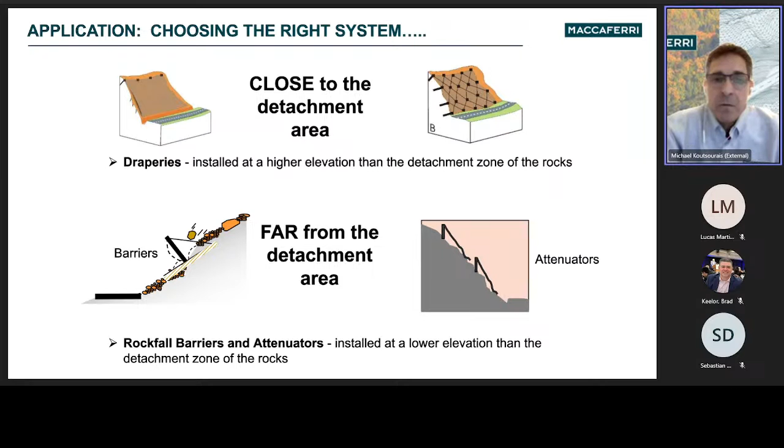Dynamic rockfall barriers are considered passive protection systems. They don't prevent the hazard from occurring, they intercept it and protect against it doing damage. It's necessary to determine the energy that the protection system must resist, as well as the protection system's required height and allowable deformation to keep the hazard from impacting adjacent people and infrastructure.

Rockfall barriers can resist energies from 10 kilojoules to 10,000 kilojoules. We generally categorize barriers with capacities of less than 100 kilojoules as low energy barriers, between 100 kilojoules and 5,000 kilojoules as medium energy level barriers, and greater than 5,000 kilojoules as high energy level barriers.

A rockfall barrier consists of many different components. The main elements are the posts, which are tied into the foundation components, and the interception panels, which are hung between the posts. However, there are also cables, anchors, and dissipators connected to these posts and interception panels that fully comprise the barrier system.

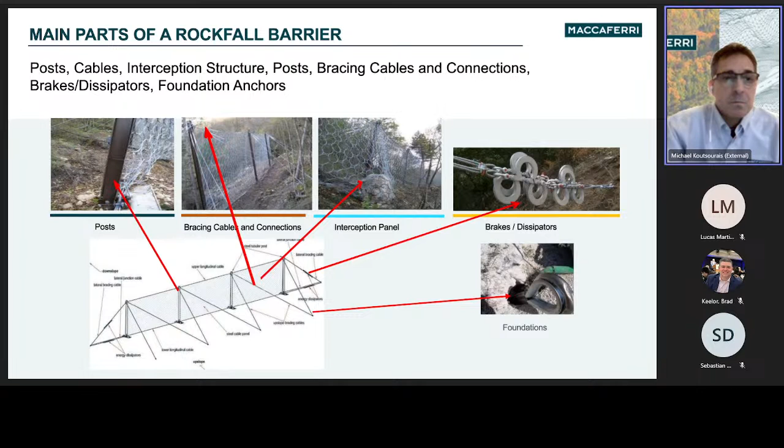Before we can apply a barrier in the field, we must know its limits, so we must first perform research testing to determine the barrier's performance. The European Organization for Technical Approvals, EOTA, developed a guidance approval of falling rock protection kits, referred to as ETAG 027. Rockfall barriers are tested in accordance with ETAG 027, and if passing the performance evaluation, the barrier is awarded a certification or CE marking.

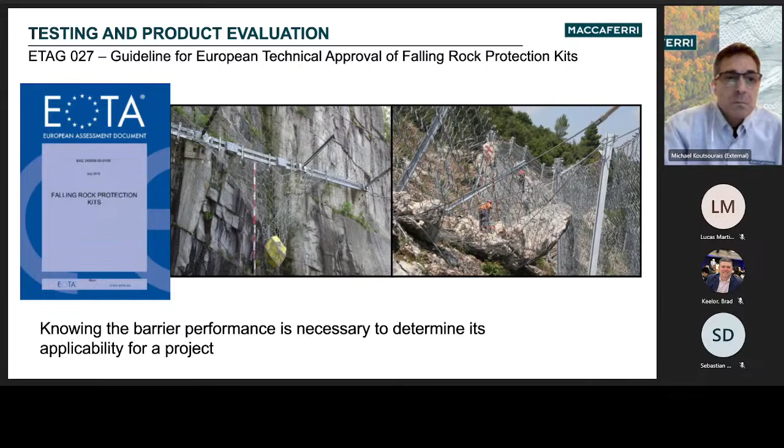ETAG 027 has been a guideline for European technical approval of falling rock protection kits. This defines the methodology to carry out full-scale field tests, and it defines the materials used for rockfall barriers. After the barrier is tested and evaluated, it receives a CE marking certification.

And here's a short video showcasing the ETAG 027 test.

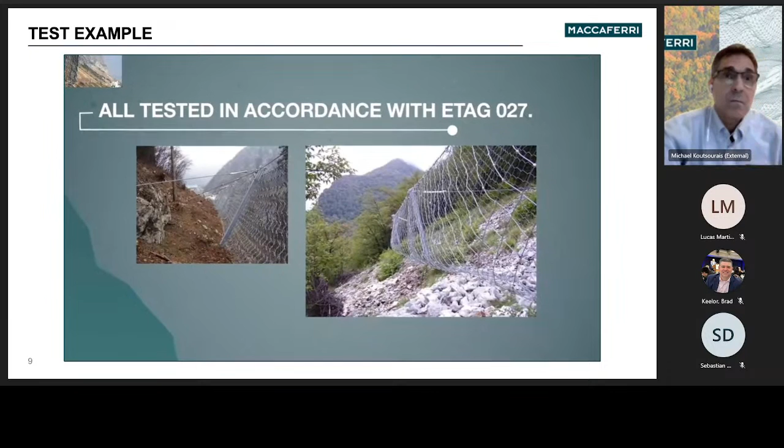There's a newly developed standard, EAD 340089, which applies to barriers less than 100 kilojoules. That's what we refer to as lightweight barriers.

One main part of the testing evaluation is to determine the barrier's maximum energy level capacity, or MEL. The maximum energy level is defined as the highest level of energy that the barrier can withstand. However, the barrier would actually be guaranteed to resist that energy, so it's in essence a minimum level of resistance for that barrier. It's certified to that specific energy level, but it will withstand impacts at least at that level.

The barrier is considered to have passed a particular MEL if it simply stops the block upon direct impact at that energy level.

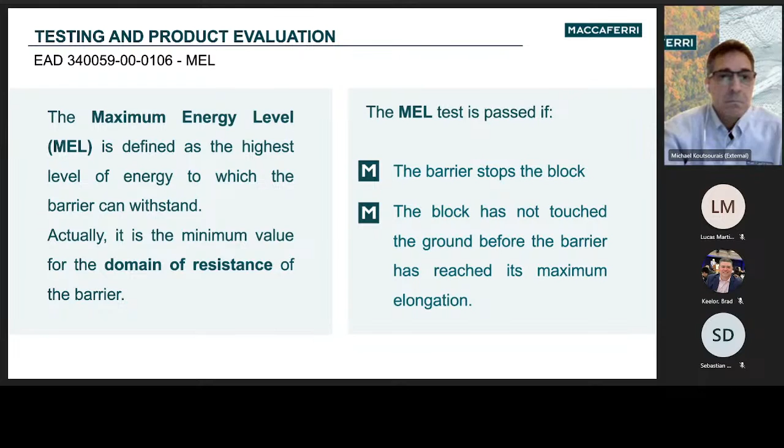Another important part of the test is to determine the service energy level of the barrier, or the SEL. The service energy level is equivalent to 1/3 of the MEL, and the barrier is required to withstand 2 impacts of that energy level without having to be repaired after the first impact.

So in essence, this is thought of as an energy level for which there is no need of maintenance after 1 impact. So if the barrier is being tested at a maximum energy level of, say, 3,000 kilojoules, it would have to sustain 1 impact of 3,000 kilojoules and 2 impacts of 1,000 kilojoules, which is 1/3 of the MEL. The SEL test is passed if, first, the barrier stops the block, and second, the residual height after the first impact is at least 70% of the original height of the barrier tested.

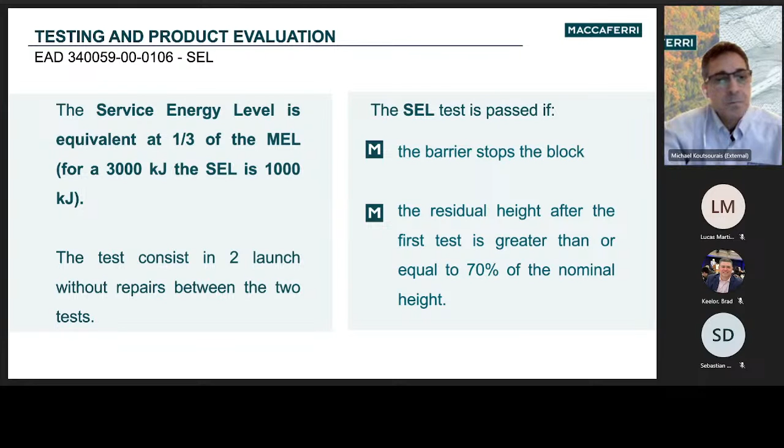Barriers are typically tested with a vertical drop of a reinforced concrete block of known dimension and density. The mean velocity of the block within the last 3 feet from the contact point with the net must be at least 25 meters per second. The impact energy is equal to the kinetic energy of the block, given by the equation: energy equals 1/2 times the mass times the impact velocity squared.

The tested barrier is installed with 4 posts providing 3 spans, as you see here. The test is conducted with the block impacting the barrier in the center of the center span. Because the test is performed on a barrier with 3 spans, it is always recommended to install barriers in actual

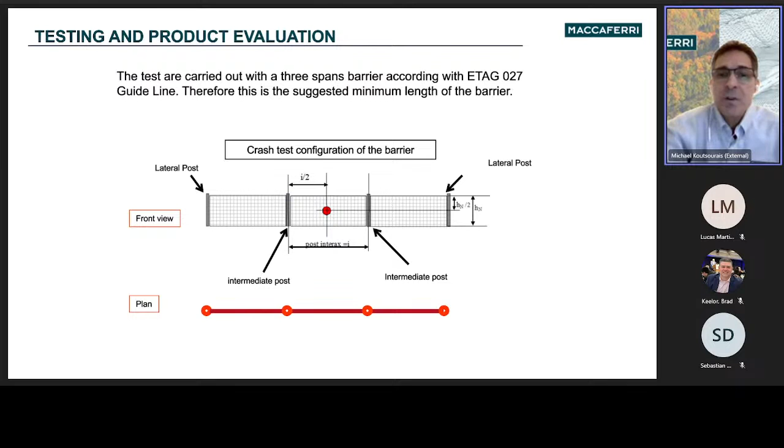field conditions with at least three spans so as to conform to the actual test conditions. Further, the EAD certification is applicable to tested barriers, but within certain geometrical limits of the barrier's height and post spacing. For example, if a barrier was tested with a height of 3 meters, you wouldn't be able to construct this barrier on your project to a height of 6 meters and still be in compliance with the certification.

The same applies to post spacing. If the tested barrier was tested with a post spacing of, say, 10 meters, you wouldn't be able to construct the same barrier with a post spacing of 5 meters and still be in compliance with the certification. So these geometrical changes will affect the barrier's performance and the foundation loads. Please keep this in mind.

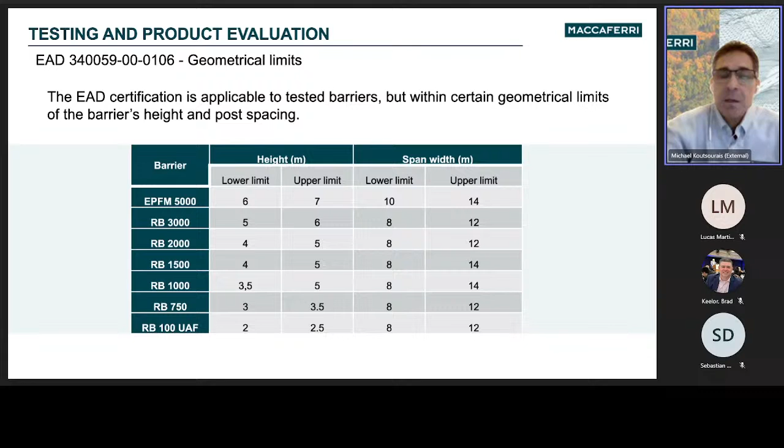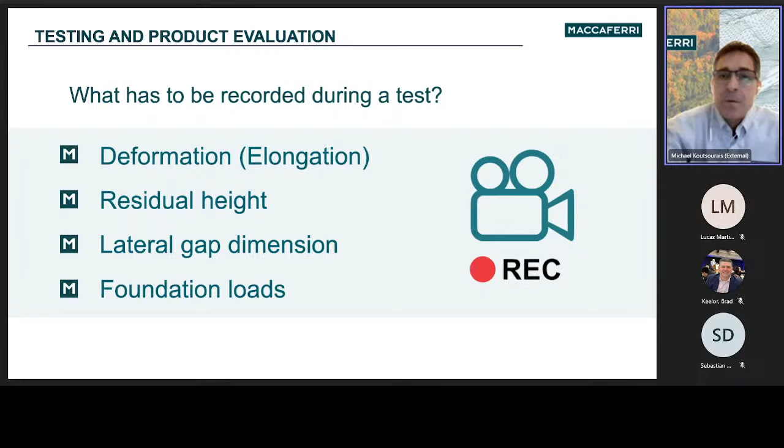During the field testing, the primary items that are recorded are the barrier deflection, the residual height, the lateral gap dimension, and the foundation loads. We'll further discuss each of these separately.

One of the key performance features recorded during the test is how much the barrier deforms or elongates when it's impacted. Remember, these are not rigid barriers. They will deform or elongate upon impact. In fact, the energy is absorbed by the barrier as it deforms - energy dissipation through deformation. It is particularly important to know the barrier's deformation upon impact when designing a barrier close to infrastructure.

Another key performance indicator is the barrier's residual height. So the barrier height is determined as the distance between the upper and lower longitudinal cables located at the top and bottom of the interception panel. As the barrier is impacted and the interception panel elongates, the height of the barrier is pulled down to its residual height. This residual height is measured as a percentage of the barrier's original height before impact. So the greater the barrier's residual height, the better the barrier has performed.

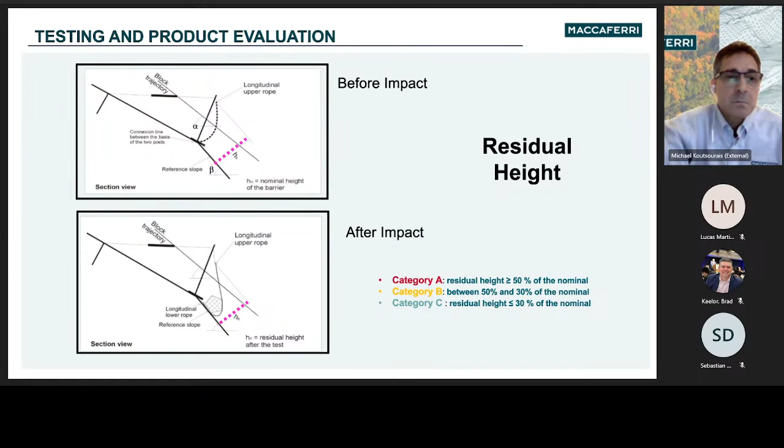The lateral gap should be considered during the design phase in order to ensure that the required protected area and the length of the barrier are equivalent. Otherwise, there may be a need to add extra length to your barrier in order to ensure full coverage of the hazard area. Essentially, all of these recorded performance features - barrier elongation, residual height, lateral gap distance - determine how well the barrier maintains its initial configuration after impact and is therefore able to maintain its protection as originally intended.

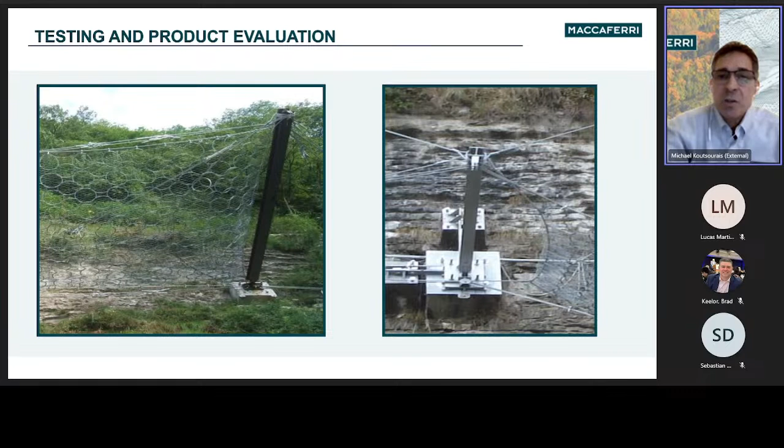In summarizing the Maccaferri portfolio of tested and certified rockfall barriers and their performance, here you'll see that Maccaferri offers a full range of tested and certified barriers ranging from 35 kilojoules, which is our RB 035 barrier, to 9,000 kilojoules, to handle your site-specific conditions. We can also custom design specific barriers for special cases, and any custom design that we do is based on the data that's developed from these tested barriers.

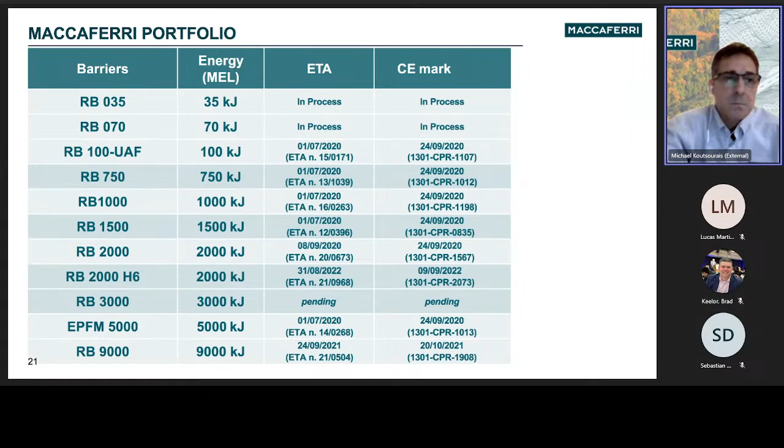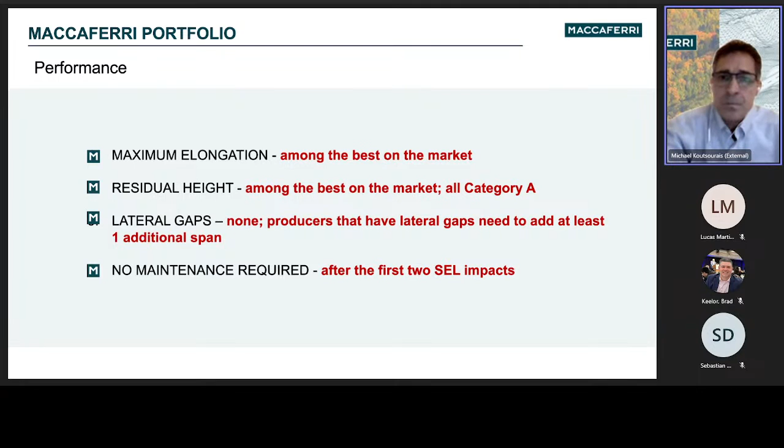Looking at the specific performance features of Maccaferri's barriers, the maximum elongation of Maccaferri barriers are amongst the lowest in the market. The residual height of the Maccaferri barriers are among the highest in the market, in the highest category A. Maccaferri barriers have no lateral gaps after impact, so there's no need to add any additional span of coverage. And after 2 service level energy impacts, Maccaferri barriers still require no maintenance. Remember, the certification only requires that after the first service level energy impact, no maintenance is required. In our case, all of our barriers, even after 2 service level energy impacts, still no maintenance is required.

Now moving into the design of rockfall barriers. The first step in the design process would be to understand the external structure of the rocks in relation to the topography of the slope, the geotechnical parameters and cross-section of concern, to understand the source of the rockfall event and its path down the slope.

The next step is to model the rockfall and select the barrier design parameters. Two software programs are often used for this purpose. One is the Colorado Rockfall Simulation Program, referred to as CRSP. The other is a Rocscience rockfall program that assesses slopes at risk for rockfall.

So first we need to model the type of instability. Specifically, is the rock free falling? Is it bouncing, rolling, or sliding? And we need to determine the initial velocity, acceleration, and position of the free fall.

So an understanding of the source of the rockfall, the design rock size, the path down the slope, the bounce features, velocity, and kinetic energy are important in order to determine where the barrier would need to be placed, how high the barrier needs to be, and how much energy the barrier needs to resist.

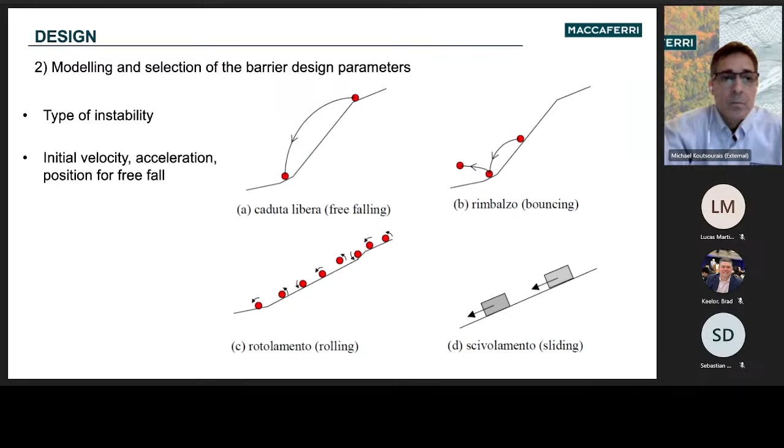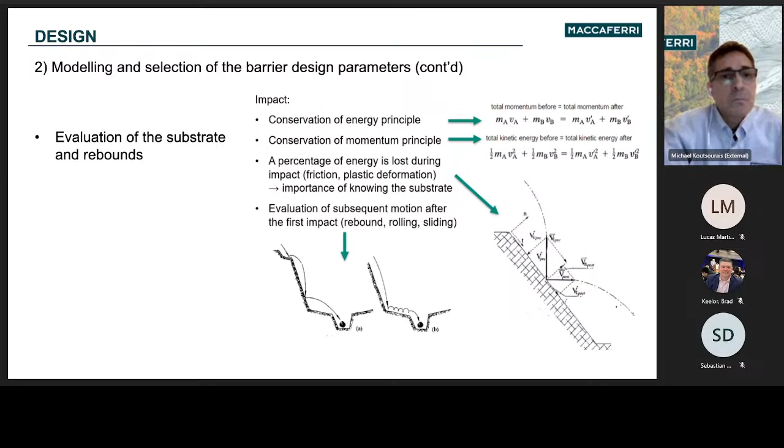The next step is to evaluate the substrate and the rockfall impact rebounds that might occur. And then finally, we need to apply those same steps for all the potential rockfall trajectories and statistically analyze the results for use in the barrier selection.

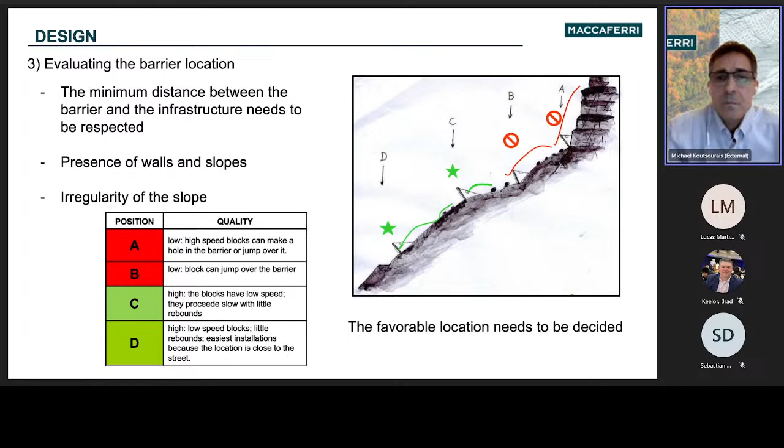The rockfall simulations will allow the designer to determine the energy that the rock will produce and the barrier must resist. So it's important to know both the maximum energy level, or MEL, that the rock will produce, as well as the energy of the more frequent rockfall occurrence, which would represent the service energy level, or SEL. The design barrier energy level should be the greater of either the maximum energy level or 3 times the energy level of the more frequent occurrence, or service energy level.

So it might also be prudent to apply a safety factor to your design energy level, depending upon the risk to human life and whether the protected infrastructure is stationary. For instance, if the protected infrastructure is stationary, then there is a higher probability of damage should an event occur. This would warrant a higher safety factor for your design energy level and barrier height.

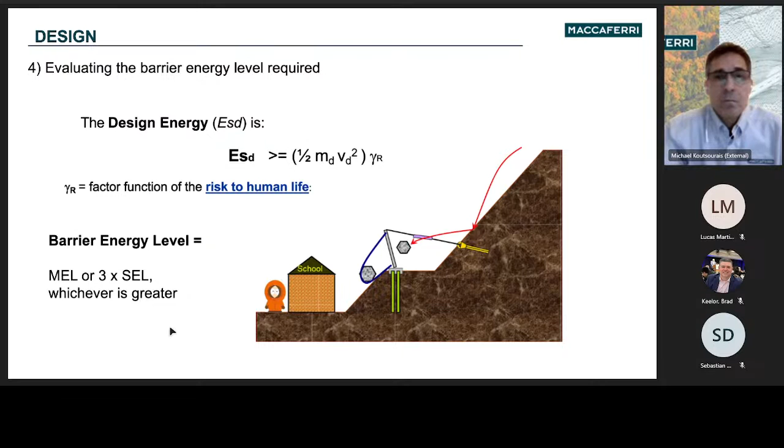When a rockfall barrier is placed, we have to verify the minimum distance between the barrier and the road or building to be protected. So barriers are designed to deform in a controlled manner in order to dissipate the rockfall energy. So we must make sure that the barrier elongation or deformation upon impact is within an acceptable distance. And the placement location of the barrier must consider how much the barrier is expected to deform upon impact. As mentioned before, Maccaferri rockfall barriers have among the lowest deformation after MEL impact available in the market.

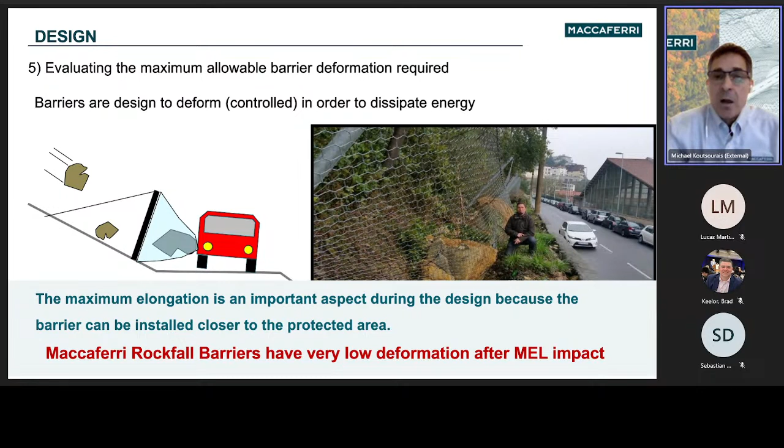The minimum height of the barrier must consider the size of the rock and its expected bounce height. Remember, the field testing that is conducted on rockfall barriers ensures that the rock impacts the interception structure in the middle of its height. So in designing the barrier height, we want to keep that in mind and strive toward keeping the rock impact within the central portion of the barrier.

So the residual height of the barrier, as mentioned before, is the barrier's height after impact as a percentage of its initial height. So the greater the residual height of the barrier, the more likely it could stop a multiple impact event. Therefore, you would want a barrier that achieves a residual height of at least 70%. Maccaferri rockfall barriers have among the highest residual height after MEL impact available in the market.

The lateral gap performance of the barrier is another important aspect to consider during the design phase. The lateral gap distance measured during full-scale field testing will determine whether the barrier length needs to be extended in the field to fully protect your desired infrastructure. Note that some barriers on the market have lateral gaps of nearly 4 meters, requiring an additional 8 meters of barrier length to account for gaps on each end. Maccaferri barriers, however, do not have any lateral gaps after MEL testing.

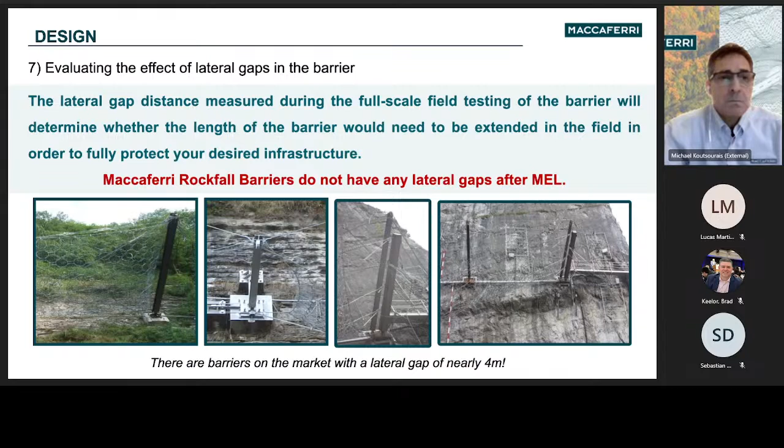Now we'll finish up the design discussion with a few slides on considerations that can influence barrier performance. Let's first recall the full-scale field testing performed on these barriers. In the field test, the impact is a direct translational force, rotational forces are very low or non-existent, and the impact occurs in the middle of the interception panel, within the center of 3 spans.

Simply speaking, any time the impact differs from that of the controlled field test, theoretically the performance of the barrier can be compromised. That doesn't mean the barrier will fail, but damage might occur and performance won't necessarily be exactly as anticipated. After all, we can't always predict where impact might occur. The barrier might be hit at the very top of the interception panel, or close to or directly into the post, which would likely damage the post and base plate, requiring replacement. However, overall, you could expect the barrier would at least stop the rock from passing through.

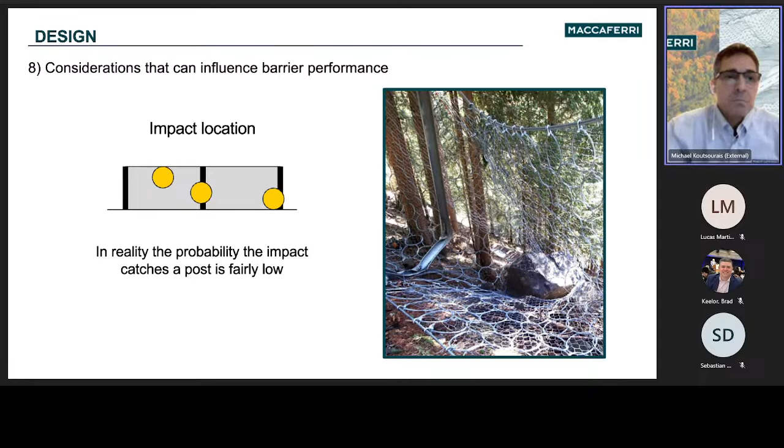In this case, the barrier was designed for a single 3,000 kilojoule impact, but was impacted multiple times, almost like a debris flow, with the largest impact exceeding 4,000 kilojoules. Even so, the barrier performed well and prevented rock from penetrating beyond it. So once again, a barrier tested to a certain maximum energy level means it will perform to at least that energy level.

It's also important to consider the elevation difference between posts. A high elevation difference may result in stress variations on the barrier elements that are difficult to quantify, so it's best to install the barrier with minimal post-to-post elevation difference. The maximum elevation difference between posts ranges anywhere from 1% to 10% of the post spacing, depending upon the stiffness or flexibility of the interception panel. We'd suggest checking with us for recommendations on a particular barrier system.

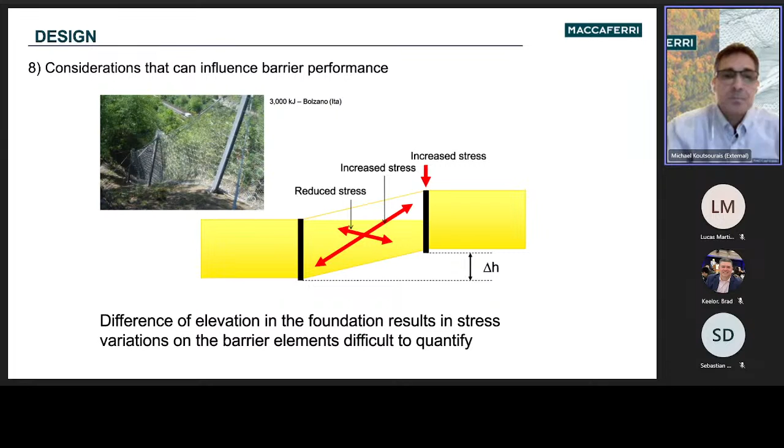Referring back to the ETAG testing, the barrier was tested with 3 spans, each about 10 meters, meaning 4 posts spaced 10 meters apart, for a total tested length of 30 meters. To conform to the barrier certification, we need at least a 3-span barrier, and the post-to-post spacing must be within a certain range of the tested barrier's spacing. For instance, if the tested post spacing was 10 meters, the spacing can range from 8 to 12 meters for the certification to remain applicable.

For longer barriers, say 180 meters, you could build it as one single barrier, though you might also consider breaking it into smaller barriers, with different options for post spacing. For instance, with a 180 meter long barrier, you could go with a single barrier at 12-meter post spacings with 15 spans, or 18 spans at 10 meters. There are different combinations that can work.

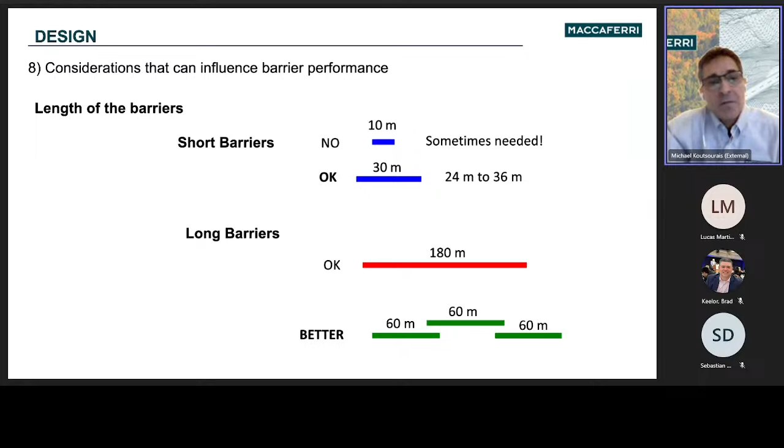That's going to be a function of just how far apart vertically these barriers are. The whole point is to keep the rock from passing by one barrier and then squeezing through the second barrier. So the lateral overlap distance is dependent upon how far apart the barriers are placed. The further apart the barrier segments are located, the more overlap is required. So the purpose of the overlap is to keep the boulders from penetrating between the adjacent segments of barrier.

When developing a specification for a rockfall barrier, these are the items that are most important and necessary for us to offer a price quotation on the system. We need the energy rating, the energy level that we're looking at.

You can either determine that based on the maximum energy level that you're expecting. But let's say the maximum energy level that you're expecting is 3,000 kilojoules, for instance. But you've also determined that the service energy level, the more frequent occurrence, might be on the order of 1,500 kilojoules. In that case, you would take the 1,500 kilojoules, the service energy level, and multiply that by 3, and that becomes 4,500 kilojoules. So in that case, you have a maximum energy level of 3,000 kilojoules, but the SEL times 3 is 4,500 kilojoules. Therefore, you would need a barrier of at least 4,500 kilojoules, and you would specify a 5,000 kilojoule barrier, because that would be the classification according to ETAG. So a 5,000 kilojoule barrier in that case would be what would be needed.

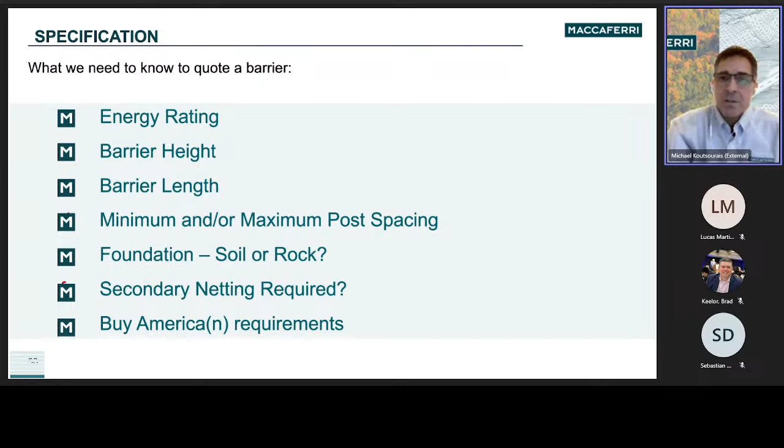We need to know the foundation information. Are we dealing with soil or rock? And then whether or not there's a secondary netting that is required to catch the smaller rocks. So we test our barriers without a secondary netting so that it's not necessary with our barriers. But a secondary netting could be used, installed simply to prevent the smaller rock from washing through. And then, of course, are there any Buy America or Buy American requirements that are required for us to pay attention to?

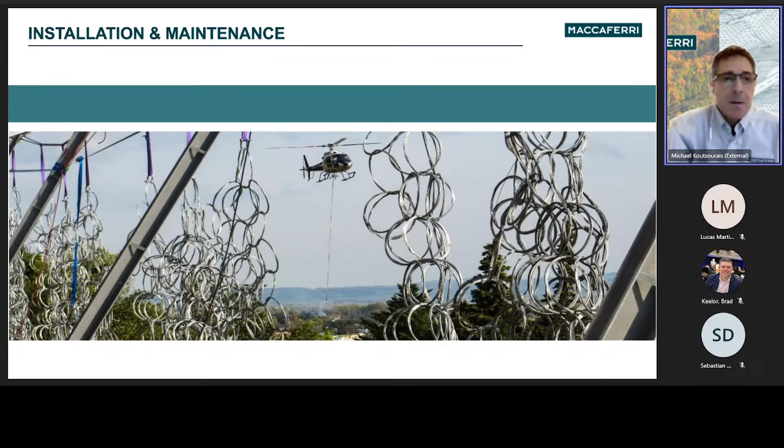The next few slides will quickly walk through the installation process. So prior to construction, the contractor will inspect the site and lay out the barrier alignments and the post locations. Then they'll verify the tolerance for alignment, orientation, and elevation.

Depending upon the ground morphology, it can be convenient to prearrange a concrete pad underneath the base plate so that it leans with the substratum of the underlying rock.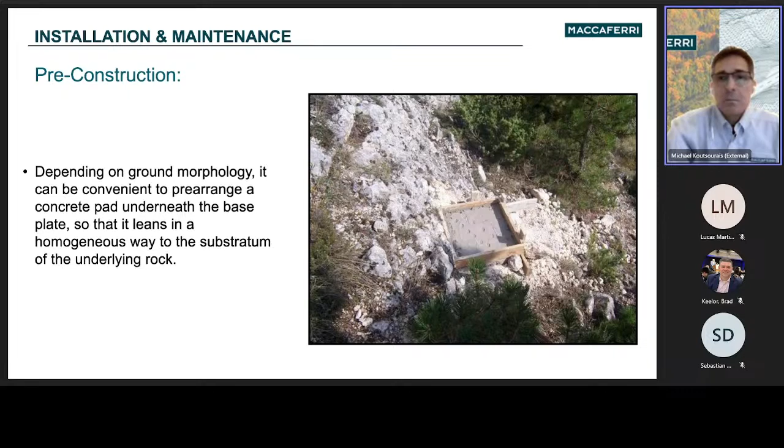In setting up the posts, the contractor will locate and install foundation bar anchors according to the geometry of the post base plate in accordance with Maccaferri standard foundations. Axial pull-out capacity should be verified as per the specifications.

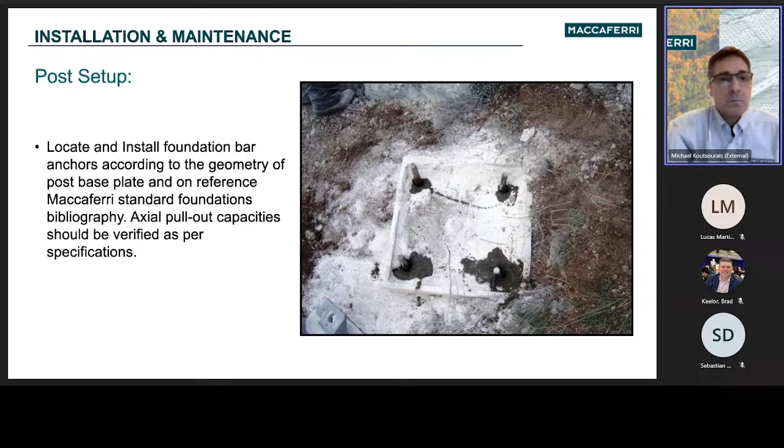Then the contractor will place the base plate, ensuring the correct orientation. Then the contractor will fasten and secure the base plate to the anchors in accordance with the Maccaferri installation guide.

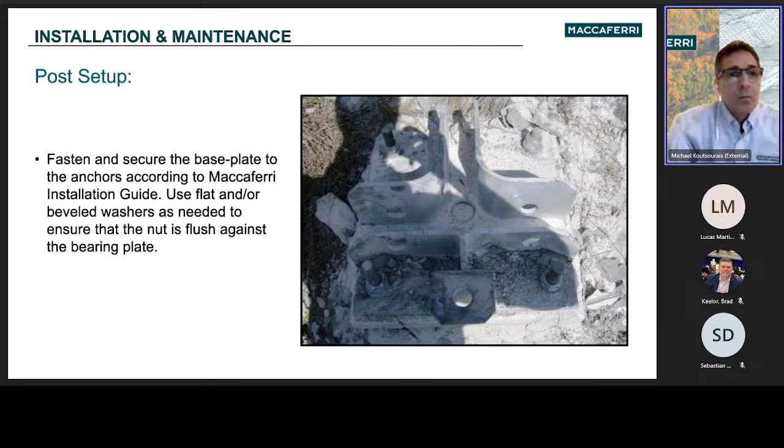The next step would be to install the wire rope anchors. The contractor will inspect and locate the upslope cable anchors, noting the ground conditions and the correct offset to the barrier alignment. Drill hole diameters according to Maccaferri's standard foundation literature, and place centralizers to position the anchor in the center of the drill hole.

And then once the anchors are installed and the grout has cured enough to achieve specified compressive strengths, you'll want to test all lateral anchors and 50% of the other anchors.

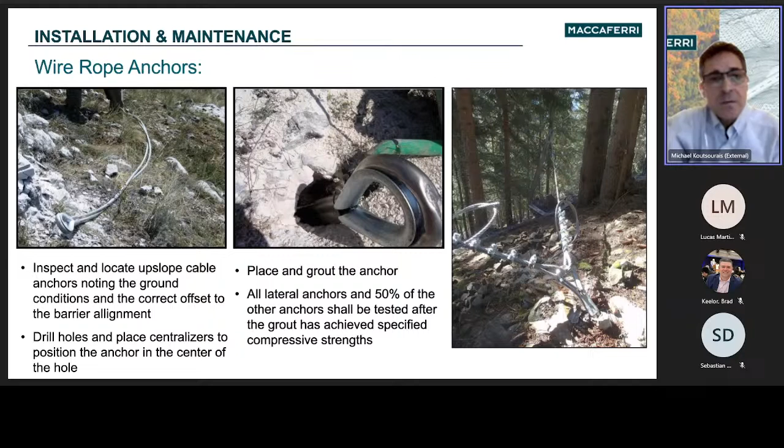When installing the posts, they will be placed on the ground straight upslope and aligned with the base plates. With the posts on the ground, the contractor will place the lateral and upslope bracing cables through the post fairleads. The contractor will refer to the Maccaferri installation manual for the details.

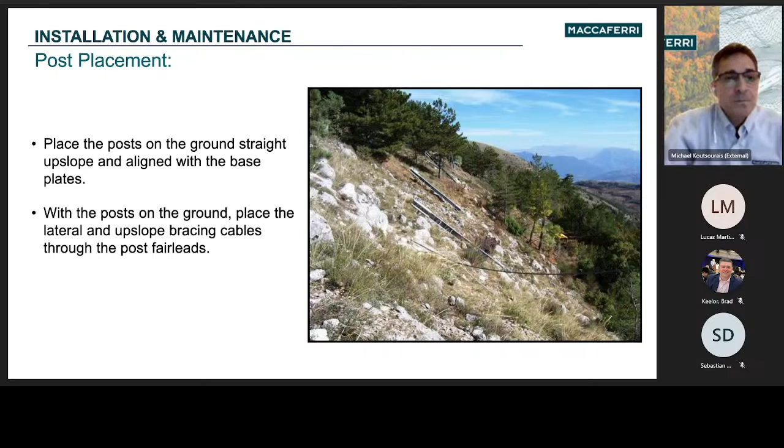When installing flexible post barriers, the contractor will insert the center bolt in the prearranged base plate slots at the base of the post and then secure it with a nut. In this way, the hinged joint of the post is realized.

Next, the contractor will install the longitudinal cables and raise the posts. The posts will be elevated to their upright position. The downslope turnbuckle device is set up, securing it to the base of the post, and is adjusted to achieve the correct inclination of the post.

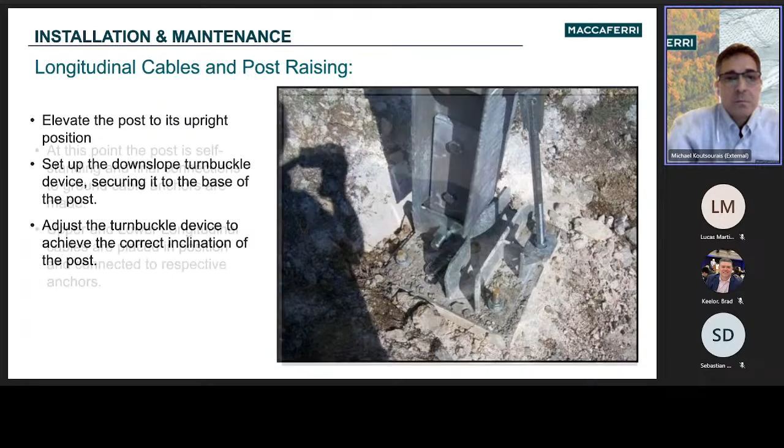At this point, the post is self-standing and final connections to ground cable anchors are made, and the upper and lower longitudinal cables are placed in position and connected to respective anchors.

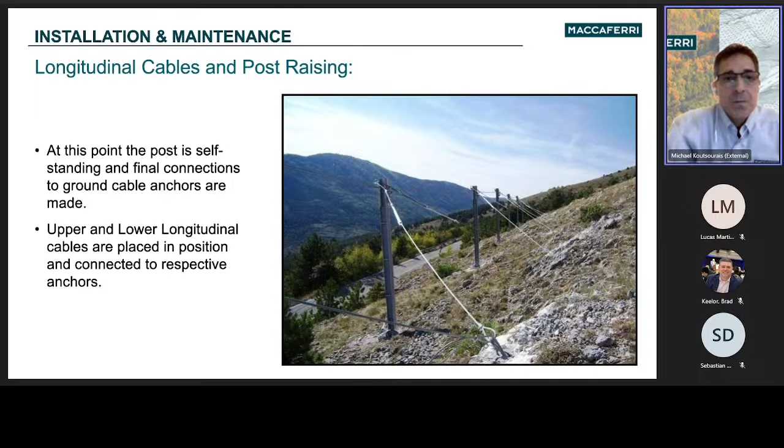Finally, the interception panels are connected to the upper and lower longitudinal cables, and the interception panels are connected to lateral end posts through the lateral junction cables. Then, if not pre-attached, the secondary layer is attached to the main interception panel.

As a rule, the various elements of the rockfall barrier require repair or replacement only as a result of impacts. A barrier should be checked immediately after each rock impact and periodically to ensure the satisfactory condition of the barrier.

And its components. It is necessary to check the interception panels, which must be kept free of obstacles of significant size that may affect the dynamic range of the system in the case of a significant impact. Maccaferri does offer checklists and maintenance manuals for easy reference.

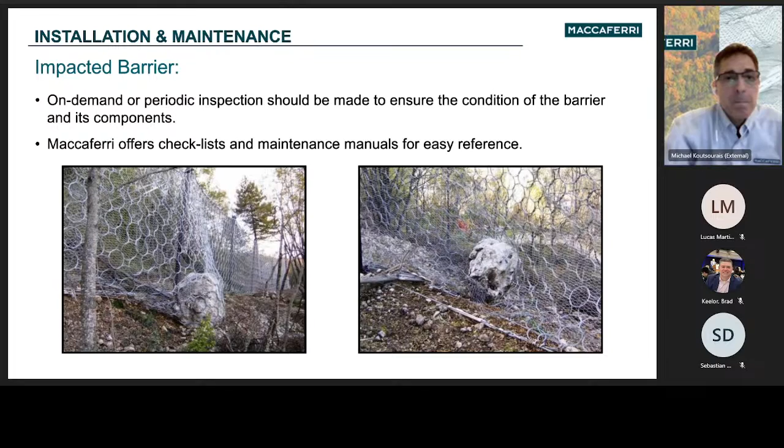Accumulated debris from landslides or rockfalls should be removed from the barrier prior to full assessment of the structural condition of the barrier, as it is often the case that compromised components will have been obscured by fallen material.

Accumulation of soil and rocks behind or on the barrier may have effects on the system performance, and deposits that are allowed to change the local slope morphology may affect the trajectory of falling rocks.

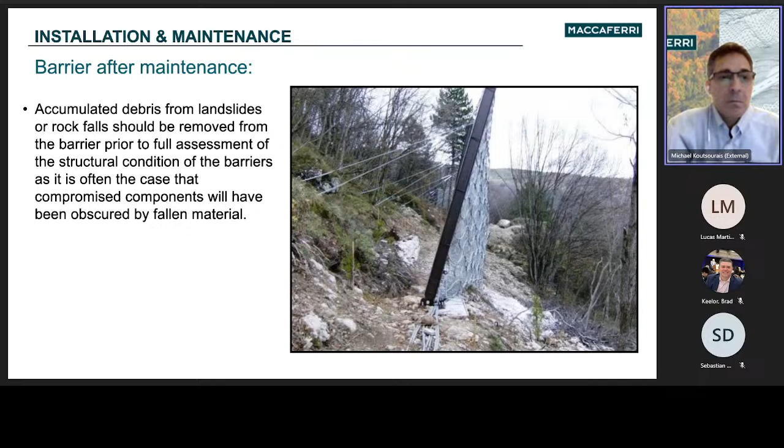Maccaferri's rockfall barriers were designed with an emphasis on the durability of the system, meanwhile requiring minimal maintenance, with obvious practical and economic advantages.

Now I'd like to introduce you to Hellomac. Hellomac is a safety feature available from Maccaferri rockfall barriers. It's an alert system installed on the rockfall barrier that detects when a rockfall event has occurred. It alerts the public and authorities of the event by sending a notification via text message, email, or mobile app.

Hellomac has been calibrated and tested by the Polytechnic of Milan. Hellomac is designed to be used as an event alert system.

Hellomac can be deployed on new rockfall protection systems, or it can be retrofit to existing systems, including those of our competitors. Hellomac can also be used to investigate and monitor the need for future rockfall protection systems at specific locations where natural events might occur, thus enabling decision makers to decide if and where to install a rockfall protection system.

For example, it can be installed on a site with a high risk of an event to record all the history of the events to help determine whether a protection system is necessary in the future.

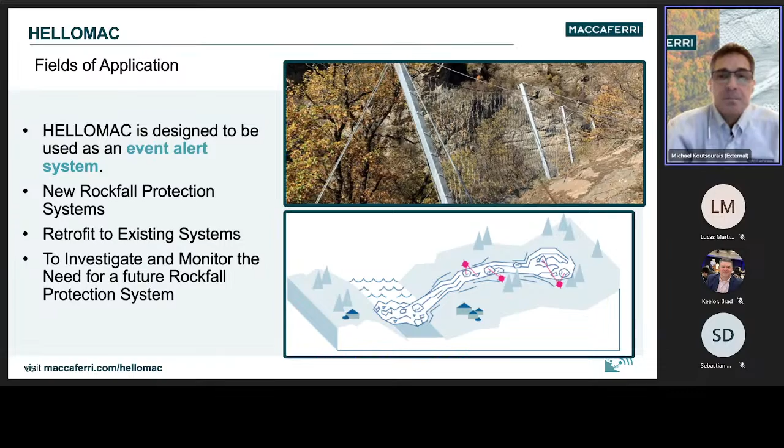Here we see what Hellomac looks like in reality, where it is installed, for example, at the top of the post on a rockfall barrier. As you can see, it's very small and it doesn't affect the barrier in any way.

The device can be installed either upslope or downslope on the barrier, but we recommend installation downslope to prevent impact. It is not mandatory to install the Hellomac to the barrier post, but for rockfall barriers, the rear of the post is considered a safe position for the device.

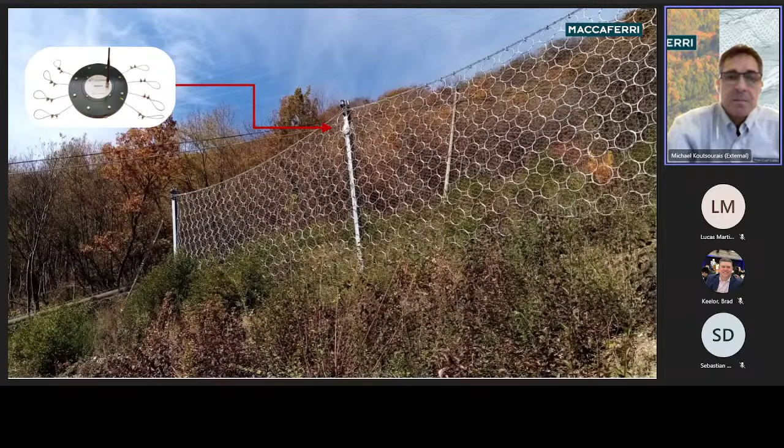The connection of the Hellomac to the barrier is very simple. The end of each arm is fixed to the specified area of the barrier. The rest of the wire, wound in a ring, is extended along the net and supported in specific points along the netting. The length of the wire is specific to the barrier being monitored.

The arms connect the disc to different positions on the rockfall protection system. So a single device is enough to monitor the impact in 8 different locations within 2 adjacent panels, 4 on each panel.

We'll now finish the rockfall barrier section of the webinar with some case histories, starting with our lightweight barriers.

This is a Colorado DOT project along I-70 in Glenwood Canyon. It's a 1 mile long, 35 kilojoule barrier installed on top of a Jersey barrier with posts spaced every 30 feet, installed by Rock Solid Solutions. This barrier is tested in accordance with European testing and certification standards and provides low elongation upon impact.

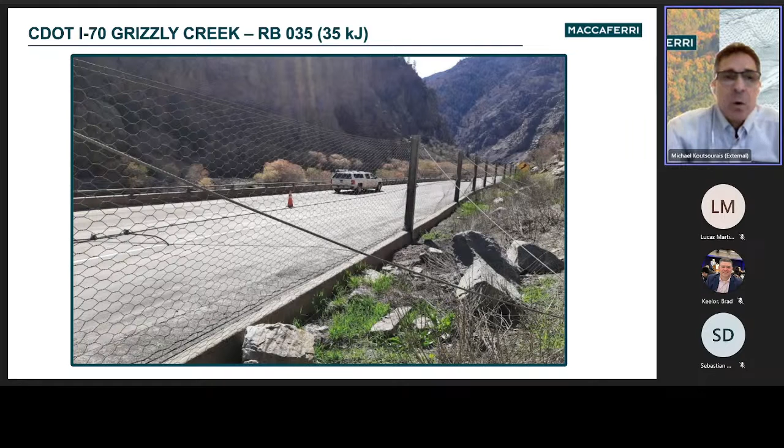Making it suitable for roadway applications for barrier heights of 6 to 8.5 feet. The interception panel is a 3.4 millimeter double twist wire mesh manufactured with a border cable.

This case study features the same solution implemented on an access road to Marine Base Camp Pendleton in California. It's a 700-foot long by 6 foot high, 35 kilojoule K-rail mounted barrier with posts spaced every 20 foot.

As depicted in the photos, it is clear to see why this is an easy installation barrier. The barrier posts are anchored into the back of the K-rail, enhancing the load transfer into the concrete barrier.

Additionally, the lateral anchors are directly secured into the K-rail, and it's worth noting that standard chain link fences mounted on K-rail are often used to provide a solution for similar applications as a lightweight rockfall barrier solution in roadside applications. However, these systems are not always tested or rated. As mentioned before, the Maccaferri lightweight barriers are tested and certified to guarantee the functionality of the barrier in these critical roadside applications.

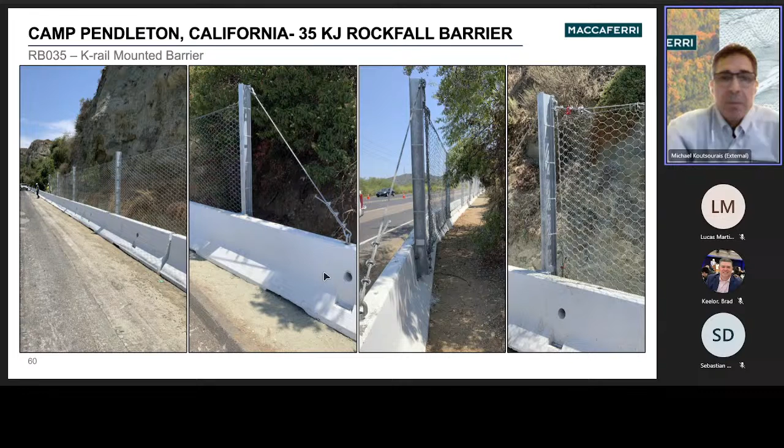This project is situated along I-90 in Idaho between Wallace and Mullan. The Idaho DOT specifications called for a 650-foot long K-rail mounted rockfall fence. Maccaferri again provided its tested 35 kilojoule rockfall barrier.

Along with providing for easy and fast installation, this lightweight roadside barrier features multiple standard foundation configurations, such as being mounted on concrete barriers, directly embedded in the ground, or self-standing. The solution highlights the adaptability of standard foundations for rockfall barriers, and is another great example of an application where a rockfall barrier is necessary and the assurance of having a tested and certified system is essential.

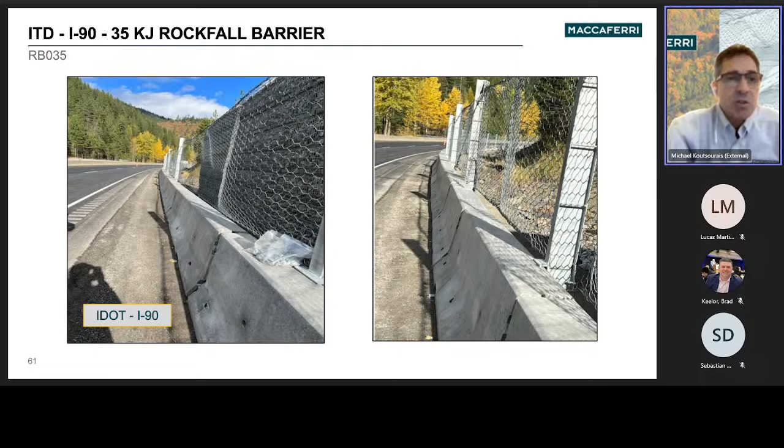This project is situated along US Route 129 near Knoxville, Tennessee, a Tennessee Department of Transportation project. As part of the current roadway project, the contractor was tasked with providing a temporary rockfall barrier for both workers and the public throughout the duration of the project.

Typically, a standard temporary movable rockfall barrier is installed and anchored on top of trench plates and moved from location to location. However, this can be costly, difficult, and inefficient for the contractor. So the solution proposed by Maccaferri offered a more efficient alternative using a fixed braced post that eliminated the need of upslope anchors. Despite the need to cover a vast area of 4,200 linear feet for the project, the contractor opted for this solution over a movable barrier because of its ease of installation and maintenance.

This is a Puerto Rico Highways and Transportation Authority project along PR 333. A Maccaferri 500 kilojoule cantilever barrier was installed, which uses the patented high energy absorption primary catchment netting.

The HEA panels provide very high energy absorption capacity at low deformation as compared to ring nets and other nettings in the market, saving an additional 7 foot of space adjacent to the highway. The barrier was installed along 328 feet of highway at a height of 10 feet and was manufactured with stainless steel to protect against the harsh tropical environment.

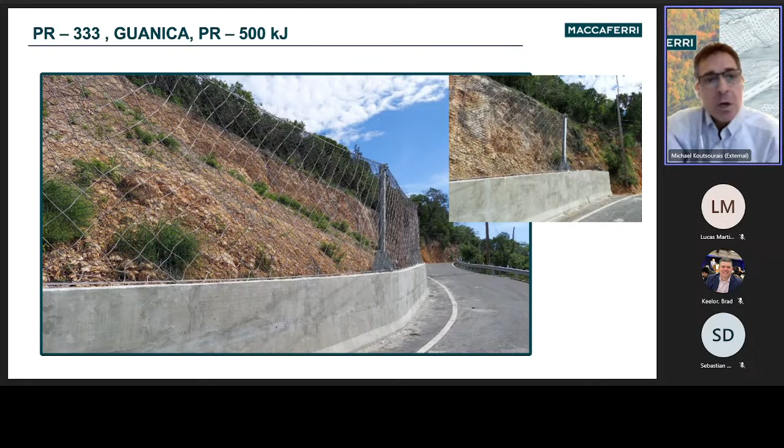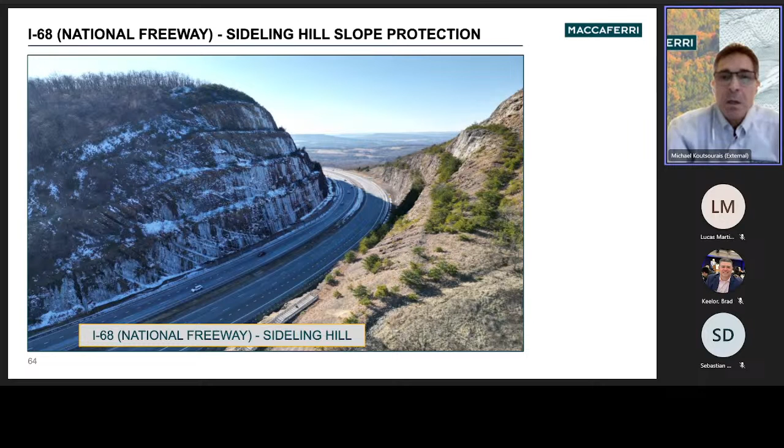This project is a Maryland State Highway project located in western Maryland on Interstate I-68, referred to as the Sideling Hill Slope Protection. Construction of the barrier was completed in 2023 with a total of 1,480 linear feet of rockfall fence successfully installed.

Schnabel Engineering designed the rockfall barrier to withstand an energy capacity of 800 kilojoules with a maximum deformation of 11 feet from the face of the posts.

To meet these requirements, Maccaferri proposed a semi-rigid rockfall barrier using its patented high energy absorption cable nets, featuring 1/2-inch diameter cables arranged in a 10-inch by 10-inch pattern. Unlike traditional ring net barriers, this heavy cable net offers a stiff response to deformation, effectively reducing the barrier deflection.

Here we have some close-up photos of the low deformation Maccaferri HEA cable net. We can also see the smaller opening double twist wire mesh attached to the cable nets in order to capture small rock debris.

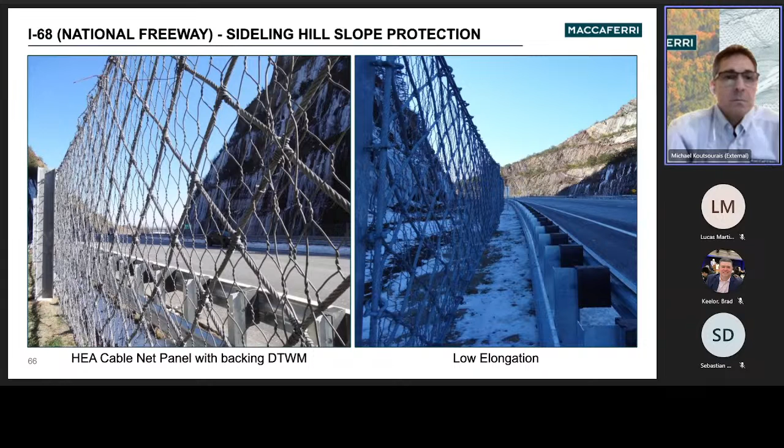As evident from these photos, the implementation of the low deformation Maccaferri high energy absorption cable net enabled the barrier to be strategically positioned approximately 11 feet away from the shoulder, optimizing its effectiveness. However, it also results in increased loads, as we stiffen up the barrier, we increase the loads on other components of the system. So to counter this, Schnabel Engineering designed heavy cantilevered posts capable to withstand this increased load.

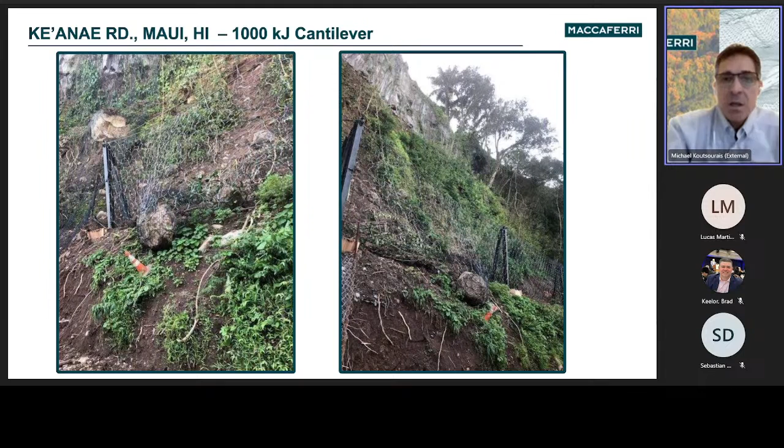As you see here, the barrier was impacted shortly after installation and performed as designed.

Wyoming DOT here was faced with a large outcrop of potentially unstable rock beside the very heavily traveled east entrance to Yellowstone National Park. The design showed that the dynamic rockfall protection barrier needed to be 20 foot high and protect over 450 linear feet of highway.

The Maccaferri 2,000 kilojoule barrier was chosen and successfully installed by Rock Solid Solutions after the summer tourist season. Due to space limitations, the barrier was installed exactly 20 feet away from the shoulder line of the highway, where the tested elongation of the Maccaferri 2,000 kilojoule barrier was 19.7 feet during a maximum energy level event.

This is a Colorado DOT project along I-70 westbound, just west of Hanging Lake Tunnel. CDOT originally installed a 16-foot high 2,000 kilojoule barrier that had seen several impacts and later upgraded to a 20-foot high 3,000 kilojoule barrier for a 150-foot long span.

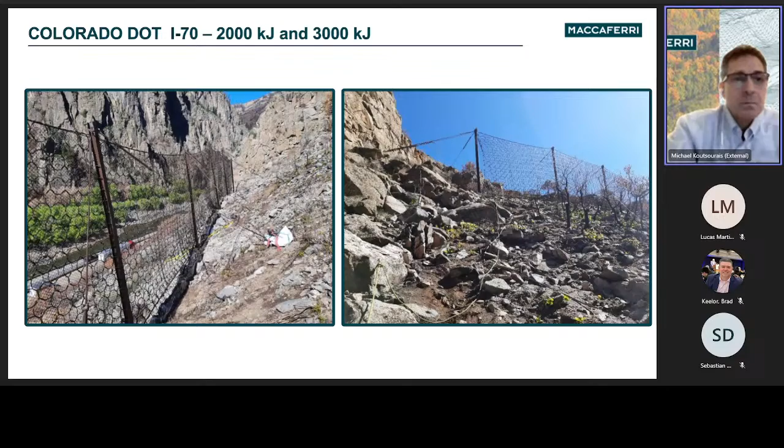Last year in early February, several large rocks came down on the Kamehameha Highway on Oahu's North Shore. This beach, the Waimea Beach and Waimea Valley Waterfall, is a major tourist attraction, and the highway hosts thousands of cars per hour. The Hawaii Department of Transportation fast-tracked the construction of a 16-foot high, low elongation rockfall barrier and contracted Hi-Tech Rockfall for installation of the barrier.

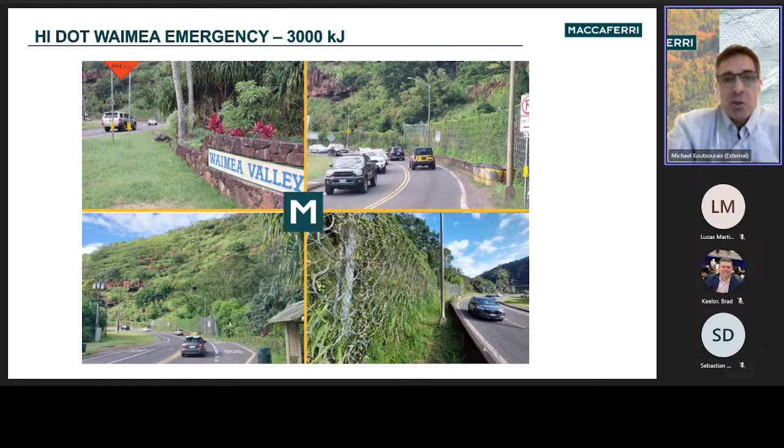The Maccaferri 3,000 kilojoule ring net rockfall barrier with a secondary cable net to limit elongation was chosen because there's such little shoulder to accommodate conventional rockfall barriers.

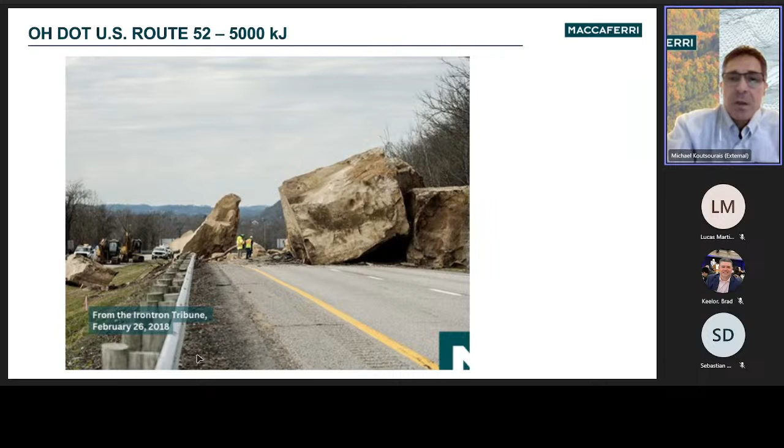This is an Ohio DOT project along US Route 52 in Union Township, Ohio. US 52 is a major highway that runs east-west along the Ohio River across southern Ohio. Several instances of very large rockfall have occurred on this highway where a house-sized boulder fell near Ironton in 2015, and again near Chesapeake, where a rock slide brought multiple large boulders onto US Route 52, closing all 4 lanes of traffic in February 2018.

To mitigate the rockfall hazard, the Ohio Department of Transportation performed a rockfall mitigation project that included the installation of a 5,000 kilojoule rockfall barrier supplied by Maccaferri. The installed barrier spanned 275 feet in length and was 15 foot high.

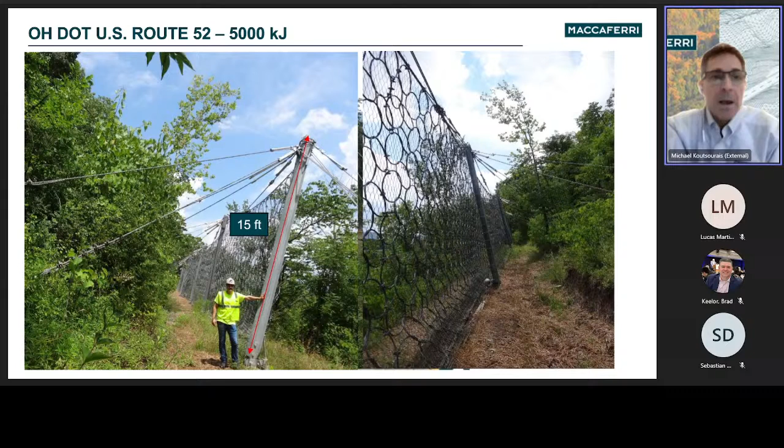The last series of slides will describe hybrid barriers and attenuators. As you see in this slide, hybrid barriers and attenuators can be described as having a rockfall drapery that is hung freely from the top of a barrier post and extending down the slope a specific distance. For a hybrid barrier, the tail end of the drapery section is anchored in order to secure the rock and not allow it to exit the system.

An attenuator, on the other hand, is a catch and release system that dampens the initial impact of the rockfall energy and controls its movement down the slope. However, an attenuator allows the rock to exit the system and enter a catchment area.

So hybrid barriers and attenuators combine the energy absorption capabilities of a dynamic rockfall barrier with the reduced maintenance advantages of a rockfall drapery system, one with a closed toe, as is the case for a hybrid barrier, and one with an open toe, as is the case of an attenuator.

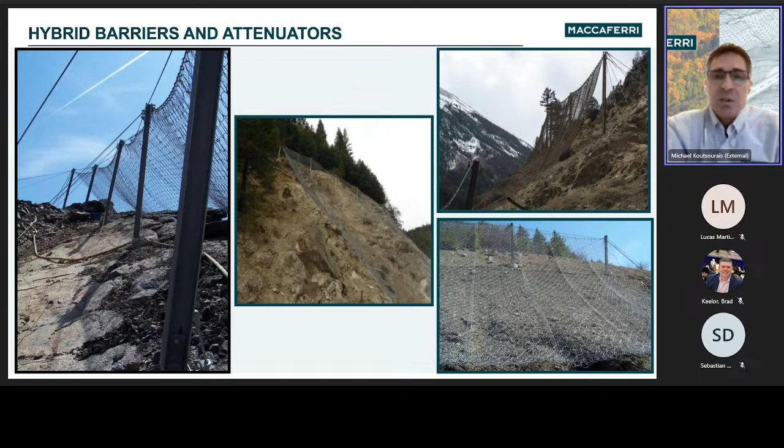They can also withstand repeated impacts without requiring repair, which makes it more cost-effective and easier to maintain versus a high-capacity dynamic barrier installed high on the slope, which must be maintained after each impact. So they're designed to progressively slow the rocks beneath the mesh, reducing energy and bounce height, and they're particularly applicable for long slopes with available catchment space at the bottom, which can be less expensive versus draping the entire slope.

Both attenuators and hybrid barriers are installed below the source zone of the rockfall and are meant to control the bounce height, velocity, and energy of the rock.

Attenuators can be installed in a series to progressively slow large rocks and guide them to a catchment ditch at the toe of the slope, or as a single structure, while hybrid barriers are designed to absorb the total energy of the rockfall. Attenuators are designed to absorb only the majority of the energy of the rocks traveling down the slope.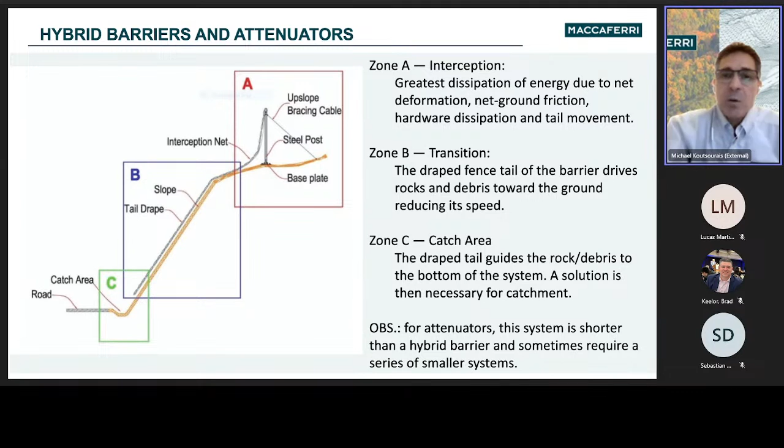Hybrid barriers and attenuators have grown in popularity. Although different entities have developed and carried out tests, studies, and model experiments, there are currently no design or testing guidelines or certifications for these systems.

After several rockfall events and fatalities along the heavily traveled Interstate 70 near Georgetown, Colorado, and in response to a lack of success of previous rockfall mitigation efforts, the Colorado Department of Transportation recognized that the site conditions at Georgetown Incline required a new mitigation approach.

So CDOT sponsored a full-scale field testing program to better understand the durability and performance of available mesh and cable net products that can be used to construct rockfall attenuators at this difficult rockfall site. The goal of the evaluation was to subject these systems and materials to realistic loading and impact conditions in order to better understand their effectiveness in dissipating rockfall energy and mitigating rockfall hazards.

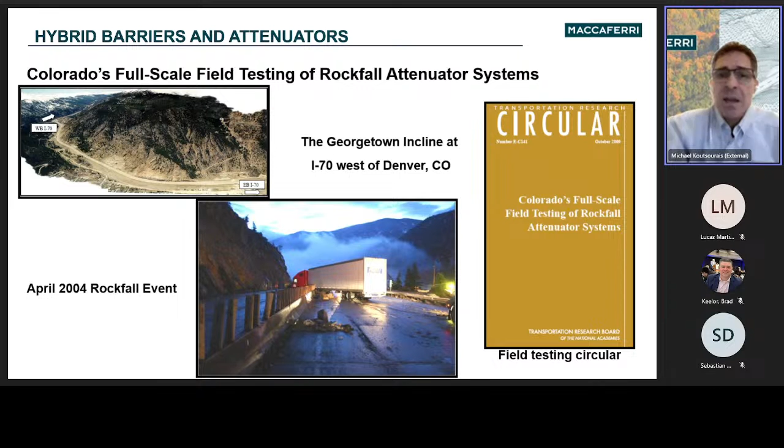Some of the main objectives of this full-scale field test were to assess the performance of different types of mesh materials to rock impacts, and to assess the effects of rotational energies as well as translational energies on the attenuator. One important aspect of an attenuator test is that rotational energies of the rock must be imparted onto the system. This is a big difference compared to how standard rockfall barriers are tested, where the impact only imparts translational energy.

Another important objective was to assess the energy dampening effect of the attenuator tail length, which is also a critical design component of an attenuator.

In order to provide controlled testing with consistent results, CDOT conducted the test using manufactured concrete blocks with a standard and consistent shape, size, and mass to reduce the inherent variability of natural rocks. A crane was then used to drop the manufactured concrete block onto a ramp, simulating energy impacts up to 500 kilojoules on a series of different mesh materials.

Observations from the testing found that the combination of panel weight, tail length, and aperture size are critical elements to the function of the attenuator system. A heavier mesh in the drape section, for instance, will require a shorter tail, while a lighter mesh may be applied for lower energies and with longer tails. The added tail length, however, can result in a rigidity of the interception panel, making it vulnerable to puncture damage.

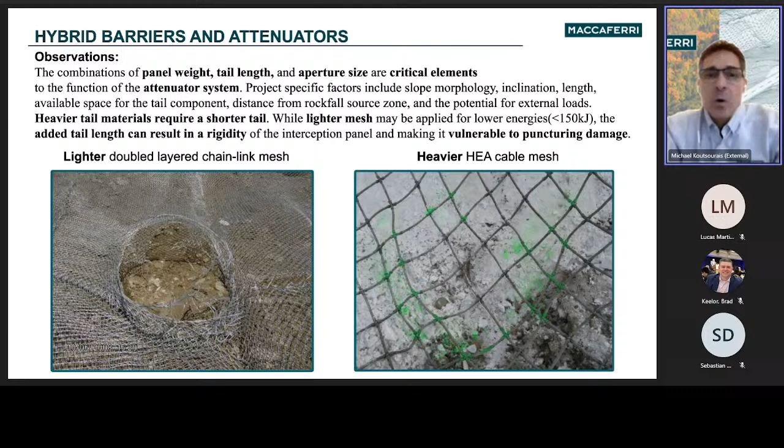The design approach for attenuator and hybrid barrier systems include evaluation of rockfall analyses to determine bounce heights and trajectories, evaluation of the dynamic impact on the barrier in order to determine required energy dissipation. This would include the expected energy level, volume, and shape of rock, and evaluation of the static loading on the barrier, for example, weight of mesh, debris loading, snow loading.

And from there, the important design factors include: is there a catchment area at the bottom of the slope? If not, the bottom of the drape will need to be secured in order to contain the rockfall. This will affect the amount of energy the hybrid barrier will need to absorb and the mesh weight and structural post properties. Mesh properties, of course, are important. These properties include the mesh weight, mass per unit area, mesh aperture size, and the minimum tail length of the drape section.

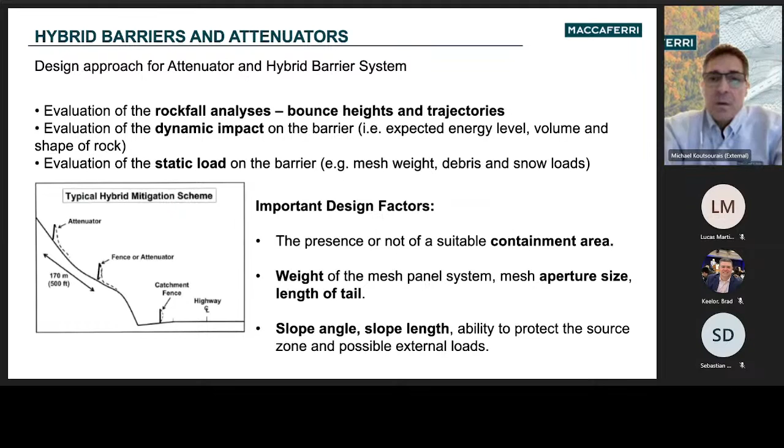Maccaferri solutions

combine the superior quality of its tested and widely used cabled mesh, SteelGrid, RockMesh, and HEA panels, with ETA tested and certified rockfall barrier support posts. Our reliable attenuator and hybrid systems can be fitted for a wide range of slope conditions.

As you see here, given a specific energy level, the product with the greater mass per unit area will require the shortest tail length. For example, SteelGrid, with a mass per unit area of 0.5 pounds per square foot, requires a longer tail length than RockMesh, with a mass per unit area of 0.7 pounds per square foot. And the HEA panel, with a mass per unit area of 1 pound per square foot, requires the least length of tail.

Finishing up with some case histories, here's a Union Pacific Railroad project where they started a modernization of track in Dunsmuir, California, and had to resolve continuing safety issues caused by rockfall. Maccaferri suggested and assisted in the design of a hybrid rockfall barrier to catch and safely control falling rock to the bottom of the slope.

As you see, the upslope portion of the drapery is lifted off the slope with the post and rigging of a flexible barrier, and the drapery mesh is then laid down the slope. In this case, the high energy absorption HEA cable nets are used to add weight to the system. Rock falling from the above drapery is caught by the lifted leading edge of the barrier and guided safely to the bottom of the slope by the mesh drapery system.

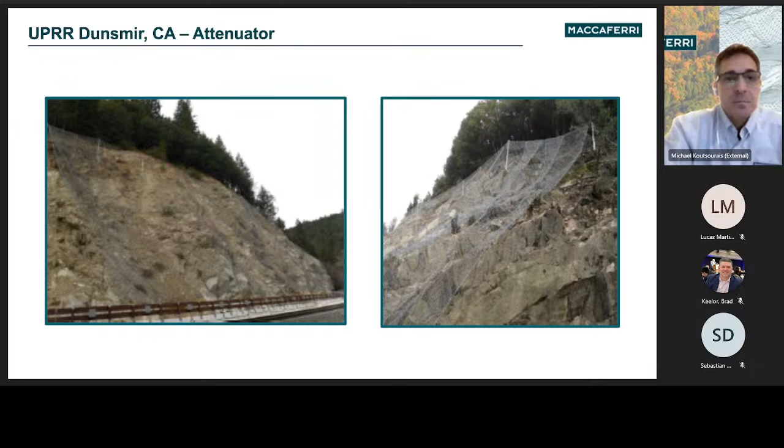In response to a series of mudslides caused by fire and flood, Santa Barbara County Public Works designed a rockfall attenuator consisting of a cable net primary reinforcement with a secondary layer of double twist wire mesh meant to catch smaller debris. Both layers were polymer coated black in order to blend with the surrounding geology. At the base of the system, a rockfall barrier was installed as an additional safety measure as a debris containment structure.

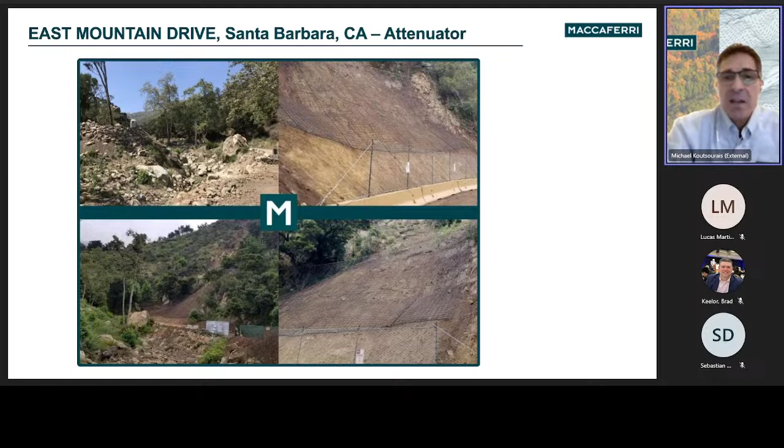This is a Wyoming DOT project in Yellowstone National Park along the Chief Joseph Highway west of Cody, near the Buffalo Bill Dam. It included hanging a cable net attenuator system supplied by Maccaferri and installed by Triptech Construction. The design engineers, Yeh and Associates, drew from the results of Colorado Department of Transportation full-scale field testing of rockfall attenuator systems to specify high-strength netting of half-inch diameter cables manufactured into a cable net with 8-inch by 8-inch openings. The attenuator system extended 16 feet high and was designed with a 40-foot tail.

The loss of stabilizing plants on the steep grade on the eastern side of Lehigh Gap in Lehigh Township, PA, resulted in the potential for rockfalls onto Pennsylvania Route 248. The National Park Service, with funding from the FHWA, sought to stabilize the 1,000-foot high slope and protect motorists and hikers along the Appalachian Trail. This included a 2,000 and 3,000 kilojoule standard hybrid barrier with ring net panels to reduce the cost of removing the rocks after impact.

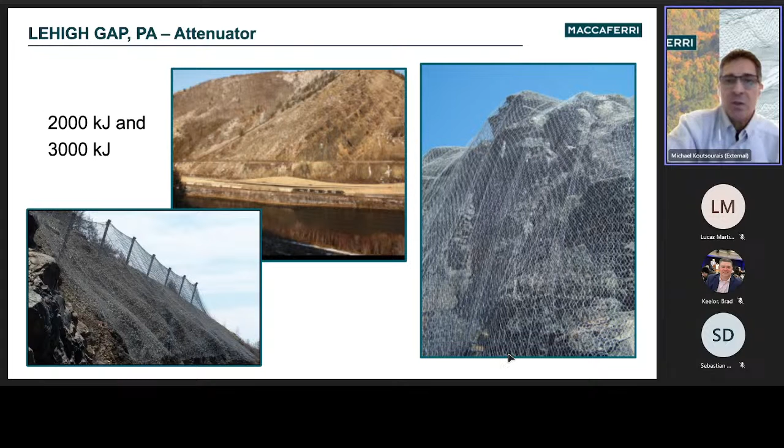And finally, this is a Washington Department of Transportation project on US 2, 5 miles west of Leavenworth. As needed, they installed a hybrid barrier system with Maccaferri high energy absorption panels again, to stabilize the rock slopes and reduce future maintenance costs due to fewer pavement repairs and less rockfall cleanup.